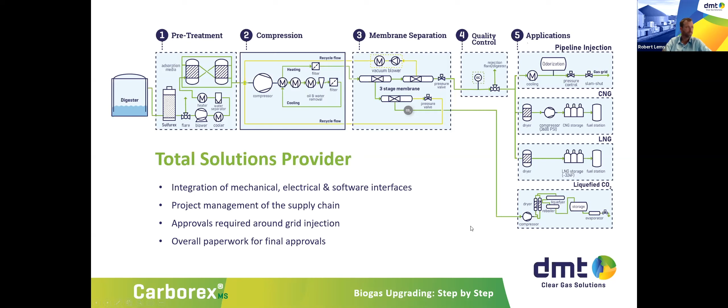People always ask, like, what is the best technology to select? And there's a lot of things to look at if you look at the technology. It's your power consumption, it's your methane slip, it's the amount of chemicals used, your operations, the price, of course. But one of the things that we see time over time is that the biggest benefit between the technologies is not that one technology is a little bit better in power and the other technology is better in methane slip. It is how well you can operate the technology and how well the uptime is.

There are plants in operation that only have an uptime of 80 or 90%. There's plants that are in operation and operate at 99%. And that is where you make your profit. That last 10% of uptime, that is where most of your profit is. So it is important to select a technology that has proven itself, that is simple to operate, and that matches with your site. So that means it matches with the climate conditions, it matches with the operators on site, it matches with the skill set. So that will be, for me, one of the key takeaways if you're selecting equipment.

Do look at the details, look at the methane slip and the power consumption, but the main thing to look at is, can you, as an operator and as a project owner, reach that uptime that you need? And every technology provider will guarantee you an uptime of 95% or 98% with all the small print in. You have to have the right operators, you have to have the right biogas. So choosing the technology that fits with your biogas and your site is important.

So coming back to the cleaning of the biogas, another choice to make in most of the plants is your desulfurization. And the first step that I showed is cleaning the biogas from VOCs, siloxanes, and H2S. And H2S can be a very big cost impact on your operation. You can see H2S numbers from 500 ppm to 10,000 ppm. So especially at the higher numbers, quite quickly it becomes expensive to remove the H2S.

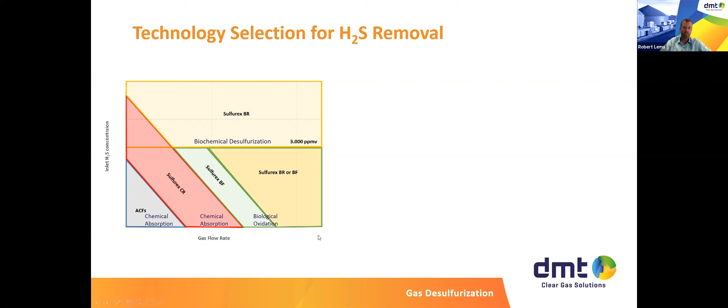So what you see here is on the left side is the amount of H2S that you have in your gas, and on the bottom, the flow rate. And this in general gives you an idea about what kind of technologies to pick. So if you have a small gas flow rate, let's say, for example, a farm-based plant with only 200 SCFM, and you also have only a low amount of H2S, about 500 ppm, you would use absorption media, like an activated carbon system or a Ferrosorp system, SulfaTreat, to absorb the H2S.

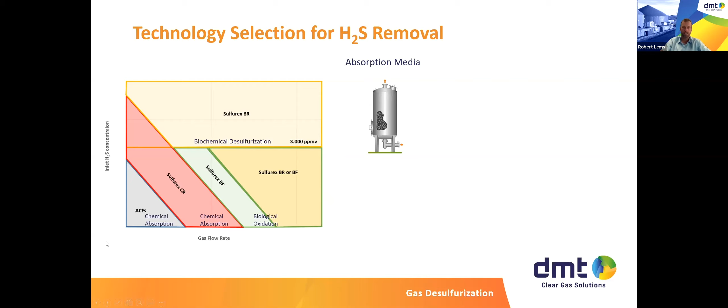If you go a little bit bigger in size and flow rates, you have a chemical scrubber, which uses caustic at a high pH to scrub down the H2S and remove it. And in that way, you have a very reliable system, but you still have a bit more operational cost with your caustic.

Next step up is a biotrickling filter. Here you have bacteria doing the work, so your operational costs are almost zero. The drawback of this system is that you have to add oxygen to the gas, which for biogas upgrading you prefer not to do. So this is a system usually only applied for biogas to power or to heat.

And for the real big amounts, we use a biological regeneration step. So what you see here is a scrubber. In the scrubber, it's the same as the chemical reaction. You take out the H2S at alkaline pH, but without using any oxygen. And then you have a separate bioreactor, which oxidizes the H2S into sulfur.

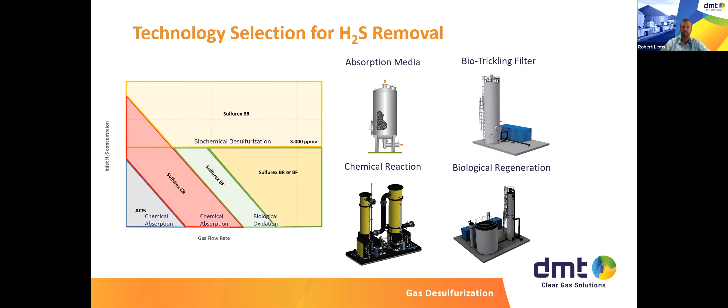So the nice thing about this system is that it has a very low operational cost and no waste stream. The sulfur that gets out, you can reutilize that in your digestate. The drawback is that it has much more operational components than, for example, the chemical system or the absorption media. So in regards to downtime and uptime, you have to know that you can operate a biological system and you have the time and expertise to operate a system.

But looking at some numbers, for example, here you see a 1500 SCFM plant with 3000 ppm of H2S. If you looked at absorption media, investment is pretty low, 250, 350 for investing in the equipment, while for the biological regeneration it's a 1.7 million investment. If you calculate on a yearly basis, your absorption media are close to $1 million, while for the biological regeneration you only spend about 50K.

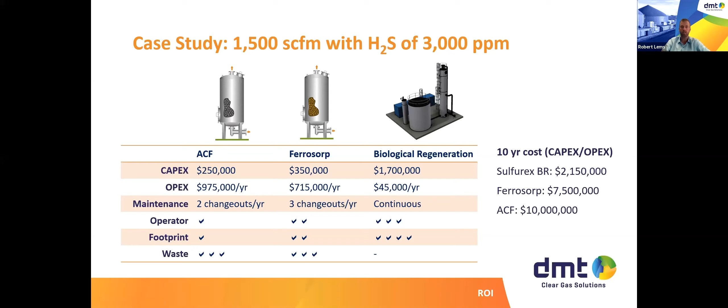So you see if you go to high flow rates, high H2S, it makes sense to go to a biological system. But again, keep in mind, the uptime is still the most important. So we have plants that are farm-based that use the Ferrosorp because of the reliability, and at a farm, you don't have an operator that knows how to operate a biological system. And we have the biological regeneration at the same kind of scale, for example, where we have an industrial partner or a developer that has his own operators on site.

Same for the gas upgrading. If you look at the gas upgrading, one of the first plants we've sold is water wash, and this is roughly how a water wash system works. So we have the compression, as pointed out before, at high pressure, like with your soda, you're absorbing the CO2 in the water. When the gas comes out, it's wet, so then you have a dryer system in between.

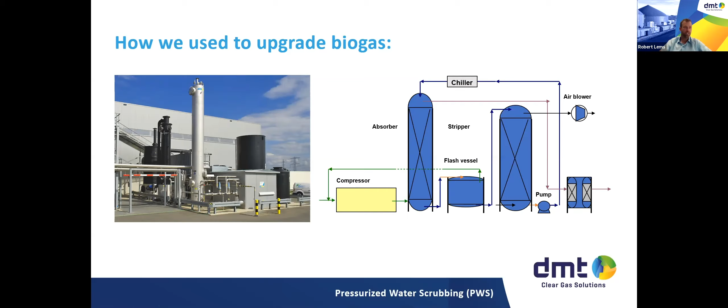And the water is then reused by shaking your soda, your beer can, and opening it up, so all the CO2 comes out again. You have a stripper with a blower, recirculation pump, and a chiller. So it's quite a process, but it's highly efficient. So if you have the right conditions, not too hot, not too cold outside, you have the right operators, you have the time to spend on this with a process engineer, it's a very good system. But we've seen it takes a lot of time to learn the system and to optimize it to a high uptime.

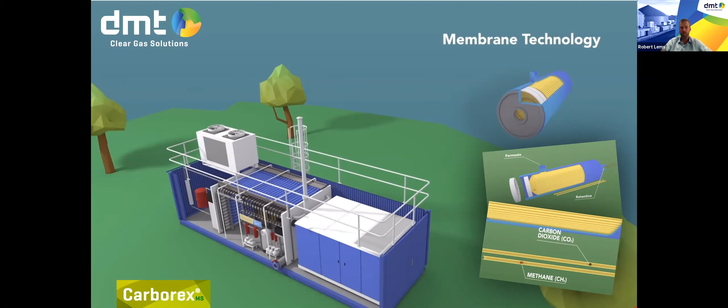So what we're doing now is membrane technology, where we get the biogas through these membrane modules, and on the outside, the retentate, you get your biomethane, while on the permeate, you get your CO2 out. So there's not much interference with outside conditions. There's not much interference with the technology itself, the operator. If you run your compressor, it's just a set point, and that's the CO2 that comes out. And the nice thing is that the CO2 comes out with part of the oxygen, with part of the H2S, and with the water. So you dry the gas in the same step as you're doing the CO2 removal.

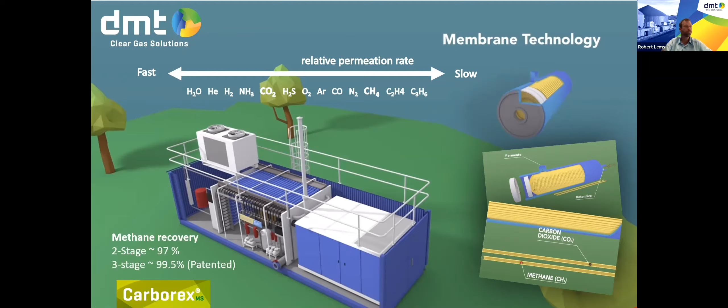With membranes, you can have different kinds of qualities. So you can have a 1-stage, a 2-stage, or a 3-stage. And with increasing amount of stages, you have better recovery. So at the 3-stage, we can get 99.5% recovery of all your methane, which results in a very low CCI number. So your CCI number, your carbon credit intensity number, defines partially how valuable your gas is. So we see more and more, especially on farm-based systems, that people choose the 3-stage because the overall money you get for your biomethane is much higher than with a single stage or a dual stage.

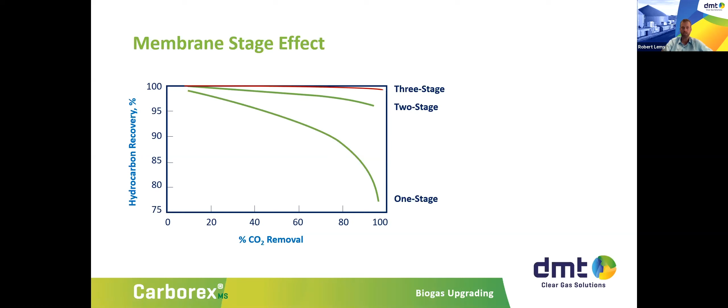So for example, a water wash is still, I would say, overall the most used technology, historically. But we see that the amount of water wash systems being sold new is declining, mainly because of the complexity of the system. We do still see there is a market for amine scrubbing, especially where you have heat available. So amine scrubbing works on heat rather than power. So if you have free heat available and you're operating at a low pressure gas grid, an amine scrubber might be a good fit.

PSA has a big benefit in regards to oxygen and nitrogen removal. They are more resilient to removing also these components. So we see a better fit for digesters that maybe have a little bit of oxygen in there, or landfill gas applications.

Membrane separation, that's the one that you see now in Europe being utilized for about 80–90% of all cases. And in the US, it's up and coming. I would say it's being utilized for about 40–50% of the cases. And it's, again, mainly about the uptime and reliability. We've sold these now up to 4,000 SCFM, while in the past those were only financially feasible up to about 500 SCFM.

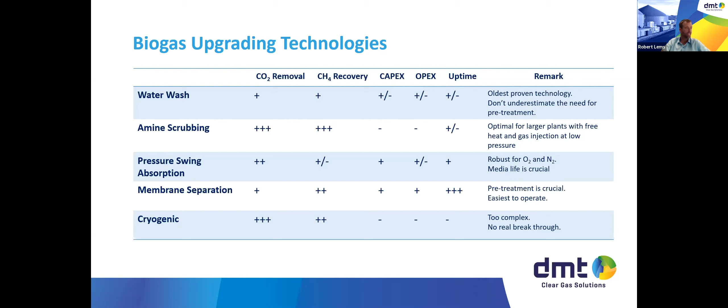Just as an example, this is our plant that has been the longest in operation here in the US. It's at Fair Oaks, Indiana, together with AMP Americas. It's dairy manure from 3 different digesters and farms brought together at 1500 SCFM and 3000 ppm. And we've installed both the membrane system and the biological regeneration system, the Sulfurex BR.

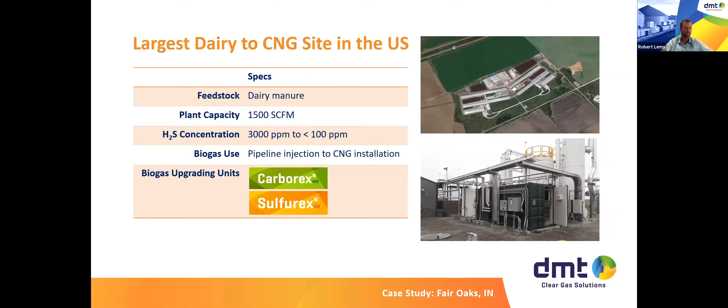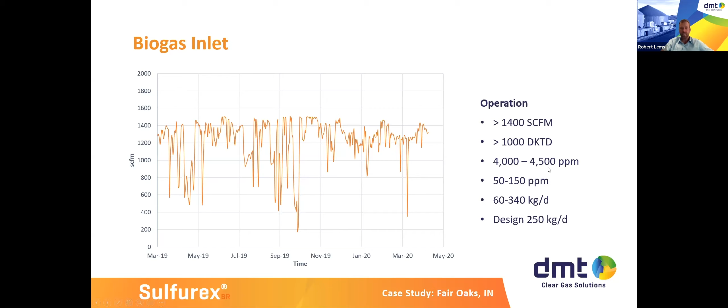So you can see we've designed it for about 1500 SCFM. They're running at similar conditions, at slightly higher ppms of H2S. And we're seeing a very steady line for the CO2 at the outlet of about 2%. You see this total setup here with the containerized membrane system and the compressor, the pre-treatment on the right side with the desulfurization, the polishing step, and then the biological desulfurization in the beginning.

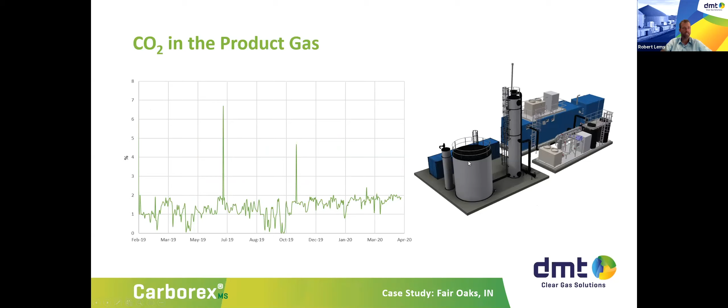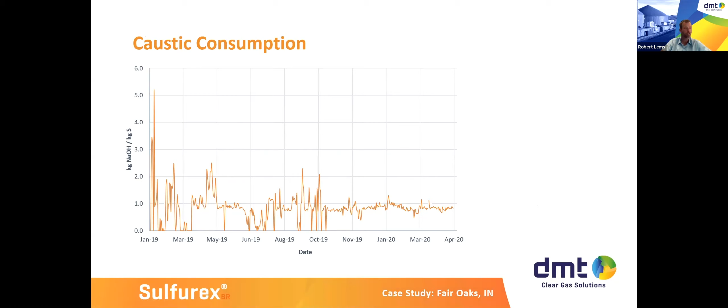Caustic consumption is very stable, less than 1 pound per pound, so very low compared to absorption media or chemical scrubbers. And then the uptime, as long as you have well trained operators, can be as high as over 95% on the MS and over 99% on the desulfurization.

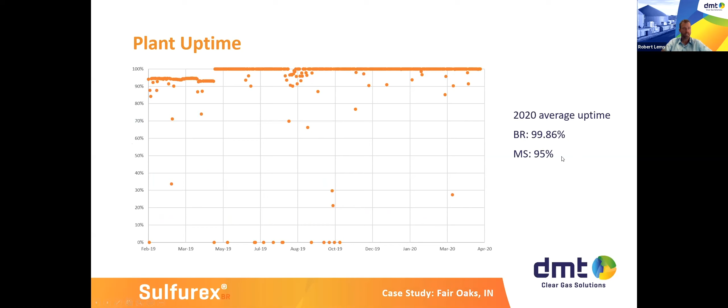So that's in very short, trying to explain a little bit the different kind of technologies that are on the market, the pros and cons, and like I said, try always to match your site conditions and your operation capacity with the technology that you're choosing. If you're losing on downtime, it's just a waste of the investment that you're doing.

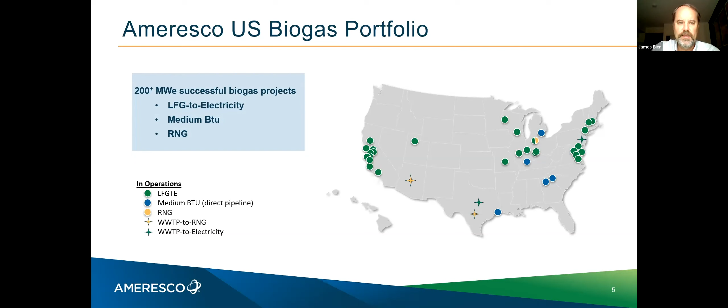Again, this just shows the wide variety of our portfolio on landfill gas, on wastewater treatment plant biogas, permitting in some of the toughest areas of the country. And then our pipeline experience, which for RNG projects is invaluable, going under riverbeds, under railroads, wetlands, roads, interstates, and highways, something that we've become very adept at doing.

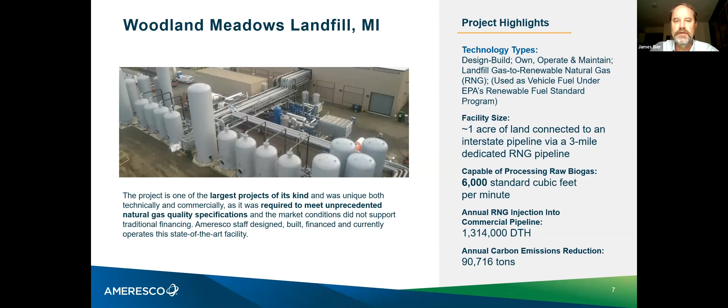Here's our Woodland Meadows project. It was our first landfill gas to RNG project. And it is not using a DMT, sorry, Robert, technology, but the project that I mentioned in Texas that's coming on later this year, we are using DMT's technology, and then also for a couple projects in California. This is the largest of Ameresco's projects. I believe it's in the top 10 largest in the U.S., so quite a large project up in Michigan that we're real proud of.

Originally, the city wanted a third-party ownership. We met some financing challenges in the project. It was early in the development of RNG markets, and lenders really weren't comfortable loaning projects that didn't have a fixed offtake. So it was really a merchant play project that experienced some challenges. We're able to overcome those now.

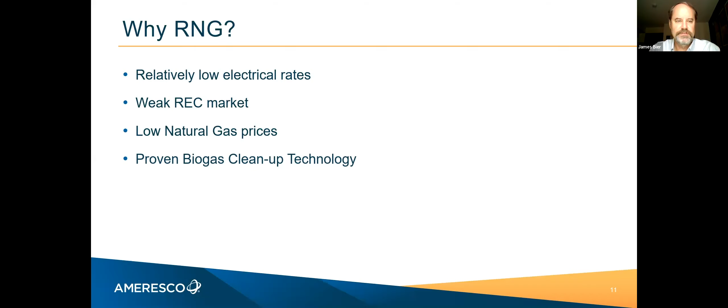And I'll take a step back real quick on why the RNG market is so hot right now. When you have biogas, you can do a couple things with it. Like I said, make electricity or sell it in its medium BTU state. Well, electric prices are relatively low across the country. The REC market is very weak in most of these markets because of solar. Natural gas prices are at historic lows. So medium BTU projects are not all that viable. And as Robert had mentioned, the cleanup technology is proven.

And then recently, I'd say in the last few years, the keen interest by the natural gas pipeline owners. I don't think a day goes by that I don't get an email, an RFP, or a webinar on decarbonizing the natural gas grid in the U.S. So lots of interest from pipeline owners in either allowing this gas to be in their pipes or actually even owning the projects or buying the output. I think everybody on this call knows the robust RIN market and LCFS market.

Certainly the middle of last year, projects were really difficult to develop at that time and find money to do the projects or find anybody really interested in the offtake. But the market has rebounded. Not to its former highs back in the 2016-2017 range, but certainly still a very healthy, robust market.

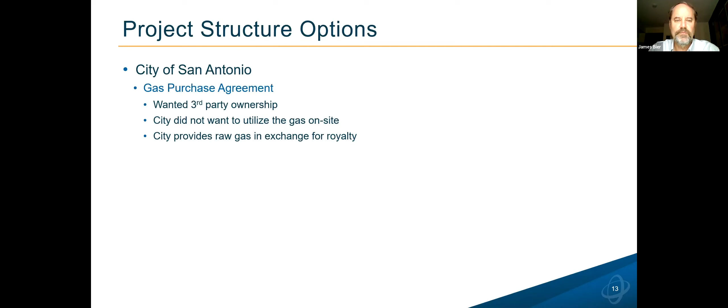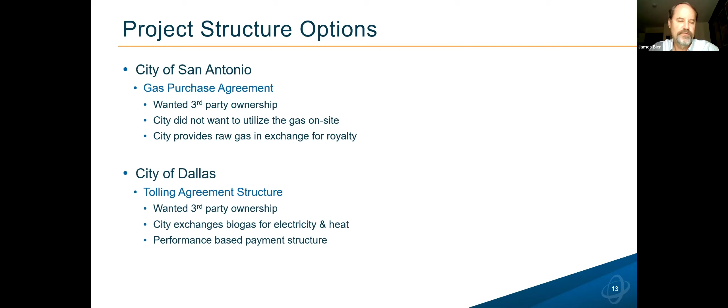So the vast majority of our projects, whether they be a municipality or a private landfill owner or another private entity, this is the way the projects are structured. The city of Dallas was a tolling agreement. Again, they didn't want to put their own capital up. They wanted somebody else to do that. And in exchange for the biogas, we provide electricity and heat at below retail rates. And this could be analogous in an RNG project, but probably not the best structure. It's a performance-based structure. Ameresco only gets paid if we perform.

The city of Philadelphia, and the reason I put this one up here is really to highlight the financing structure here. It's a tax lease. It's a very complicated deal. This was done during the first stimulus package back in the 2008, 2009 timeframe, and we wanted to capture that money, but that money was only available to private companies.

So our finance group, which I think are some of the best and brightest in the industry, really came up with a way for us to utilize not only that tax money, but also the low cost of financing. I mean, no private company is going to get money cheaper than a municipality can through a bond or other mechanisms. And I really want to highlight here the transparent and collaborative process. These things are, I call them marathon roller coaster rides; they have all their ups and downs, and it has to be transparent. It has to be working together.

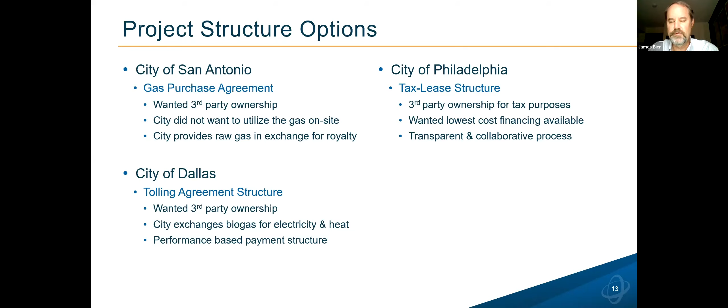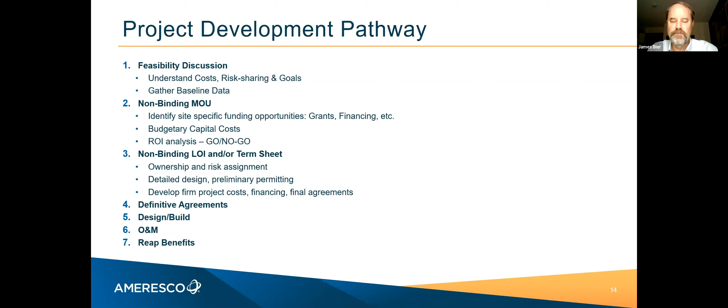And then also going through a reiterative process of the financial models, and laying the groundwork for the definitive agreements. In most cases, again, that would be a gas purchase agreement. After that's done, you go to the design build phase, then the operational phase, and after that you really end up reaping the financial and environmental benefits of these projects.

So for people on the call that are interested in developing a project, I can't overemphasize the need to hire experts, people that have done this before, but that also have the cash on hand or credit line to start the project, and access to capital to complete the project. All of the parties in the deal, including the fuel supplier and the off-taker, and even your EPC and O&M contractors, need to be creditworthy. You have to have EPC and O&M contractors that have performance guarantees that they can meet. So it's important to partner with people that have done this before and are creditworthy.

And again, I can't overemphasize the importance of having a local partner, somebody that has a team that understands the local technical and operational problems, and a local leader. Permitting with local agencies is critical. The policies and procedures of the local building codes are extremely important.